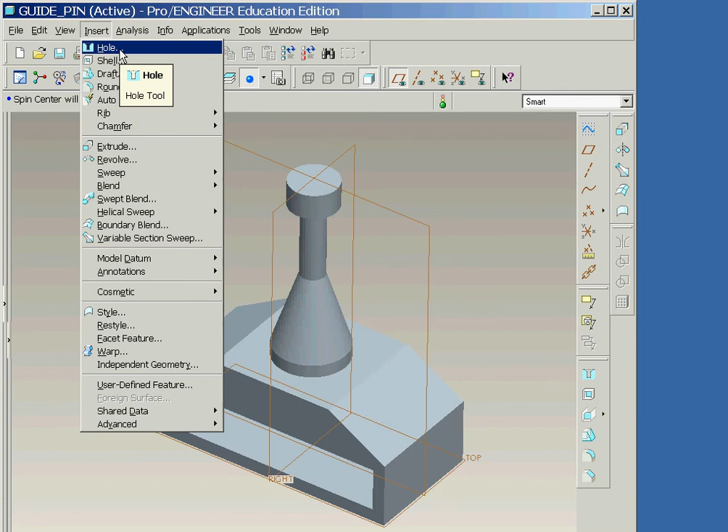This time we'll make use of the pull-down commands, Insert, Hole, and then make sure that Straight is selected as the hole type in the dashboard.

We will now click on the inclined surface at the approximate location of the center of the hole. Using the drag handles, we will now select the front datum plane as a dimensioning reference, and the upper edge of the end surface as shown here.

We will now click on each of these dimensions and set their values to 3. And then change the diameter dimension to 2.

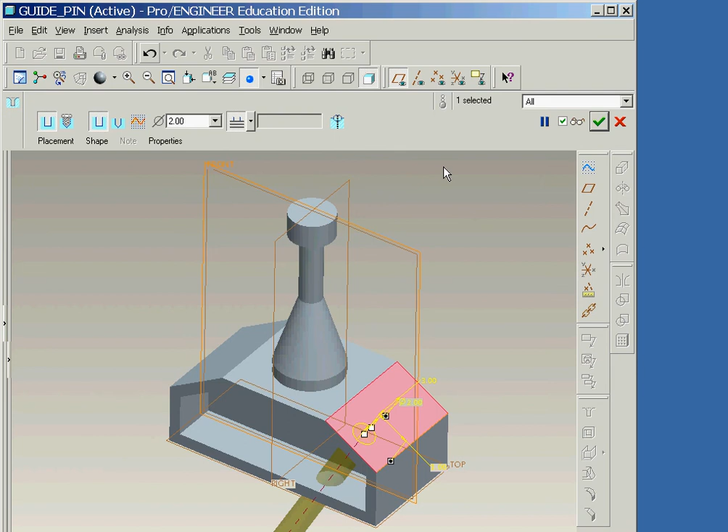In the depth specification area of the dashboard, we'll change it to Drill up to next surface. Then we'll click on the Verify button, followed by clicking on the check mark icon.

Now that we have the first hole, we'll use 2 different copy operations to create the other holes. This is the same technique that was used to create the second pocket in the previous session. Our first copy operation involves mirroring about the front datum plane.

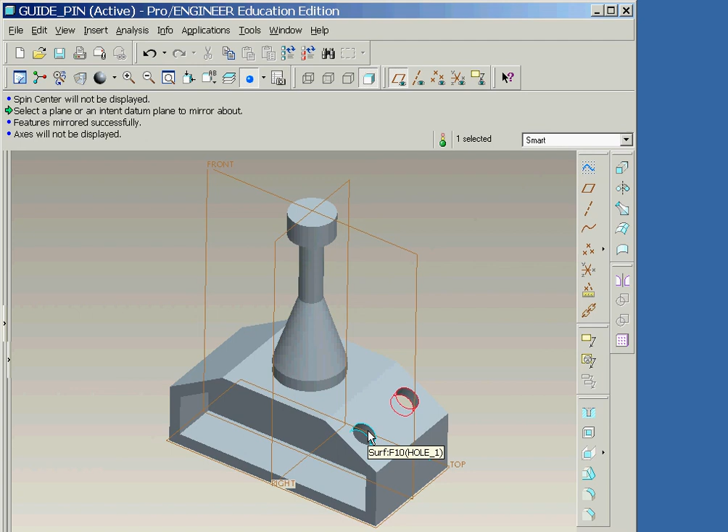And then our second copy operation, which will copy both of the holes that now exist, involves first selecting them both by depressing the Control key while clicking on both holes, and then mirroring about the right datum plane.

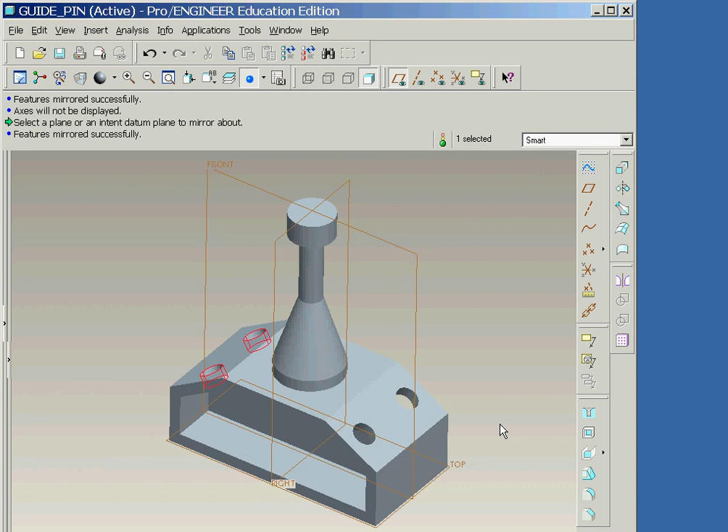We will now add a fillet where the shaft meets the base, and then round off the edges on the top of the guide pin. Pro E uses the command round for both of these operations.

We will start with a fillet by first pre-selecting the edge where the revolved feature meets the base. And then click the right mouse button and select the Round Edges option.

Now we'll set the radius to 0.5 units. And then click the middle mouse button to finish.

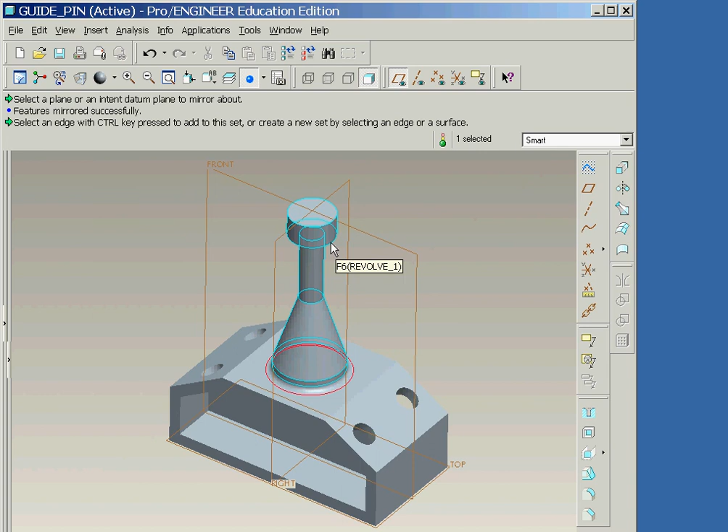The rounds at the top are created in a similar fashion. However, this time we'll select the edges while holding down the Control key, which allows multiple edges to be selected. Then we'll click the right mouse button and select the Round Edges option.

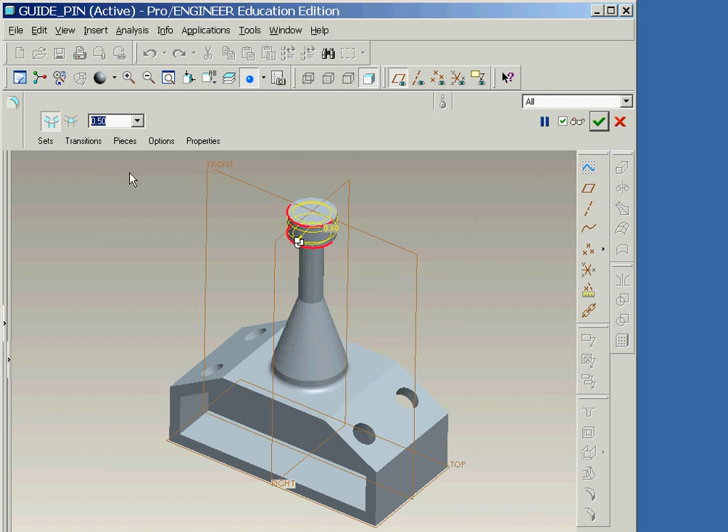Now the radius value is set to 0.5 units. And then we will click the middle mouse button to finish.

The final feature that we will add is a chamfer all around the side edges of the part. We will start by clicking on the chamfer icon. And then we will begin clicking on the edges of the pocket while holding down the Control key.

After the last edge is selected, we'll set the chamfer size to 0.25 in the dashboard. We will now start the definition of a second set of edges by clicking on the edge shown here without holding down the Control key.

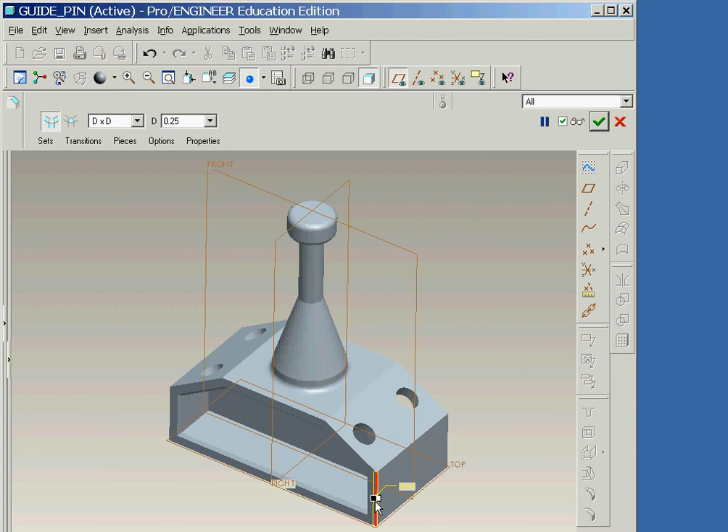And then holding down the Control key again, we will click on the other edges. And then finally, we'll verify and accept the chamfers.